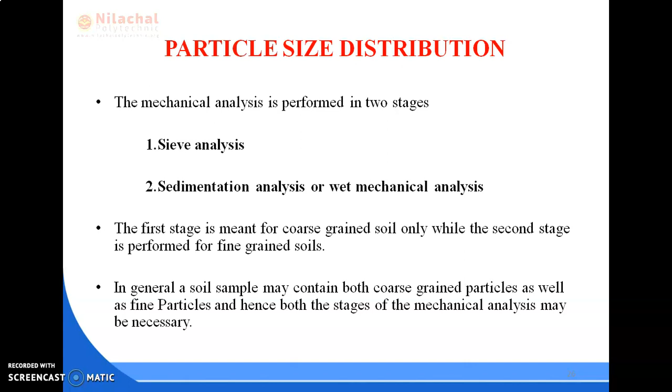So first is the sieve analysis. The complete sieve analysis is again divided into two parts: fine analysis and coarse analysis. In the Indian standard IS 460-1962, the sieves are designated by the size of the aperture in millimeters. The sieve analysis is termed for the particles having size greater than 75 micron or 0.075 mm. In that case, we prefer the sieve analysis method to segregate the different particle sizes of soil.

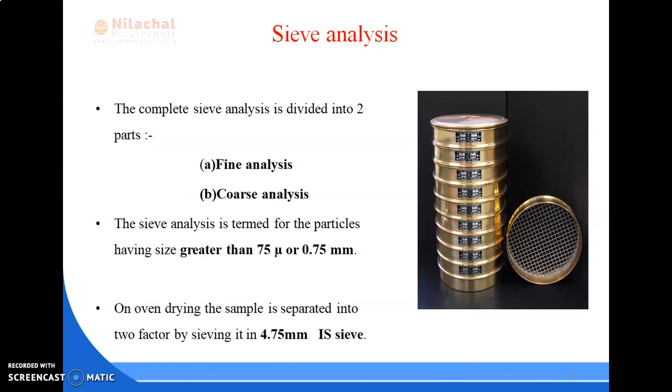On oven drying, the sample is separated into two fractions by sieving it on a 4.75 mm IS sieve. The soil portion retained on the 4.75 mm IS sieve is called the gravel fraction and is kept for coarse analysis, and the soil portion passing through the 4.75 mm IS sieve is subjected to fine analysis. Those passing through are known as fine grained soil, and those retained on the 4.75 mm IS sieve are known as coarse grained soil or gravel fraction.

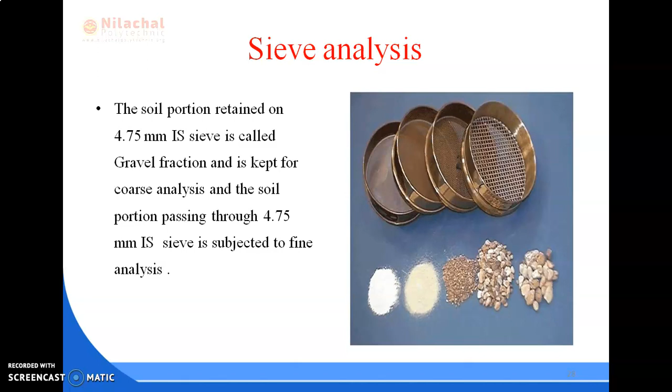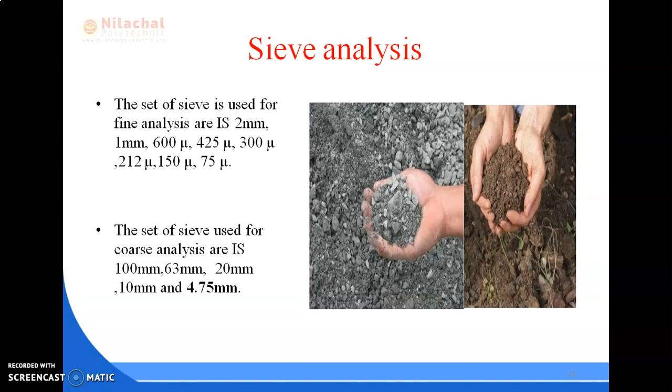Next, the set of sieves we use for the fine analysis are IS 2 mm, 1 mm, 600 micron, 425 micron, 300 micron, 212 micron, 150 micron and 75 micron, according to the Indian Standard Code. The set of sieves we use for coarse analysis are IS 100 mm, 63 mm, 20 mm, 10 mm and 4.75 mm.

Next is sedimentation analysis or wet mechanical analysis. It is conducted on the soil fraction finer than 75 micron, which is kept in suspension in a liquid, usually water. The analysis is based on Stokes' law, according to which the velocity at which grains settle out of suspension, all other factors being equal, is dependent upon the shape, weight and size of the particle.

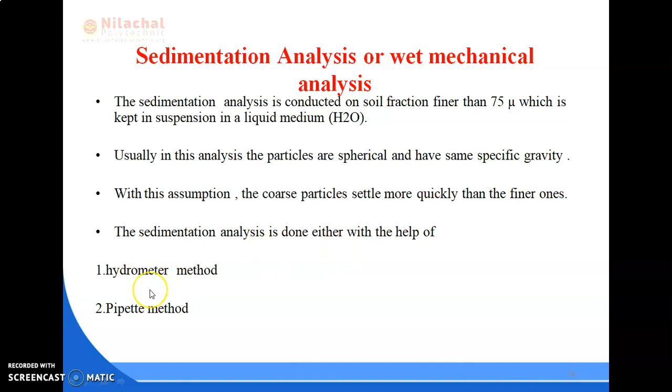However, in the usual analysis, it is assumed that the soil particles are spherical in shape and have the same specific gravity. With this assumption, the coarser particles settle more quickly than the finer ones. The sedimentation analysis is done using either the hydrometer method or the pipette method to find the particle size distribution.

In both the methods, a suitable amount of oven-dried soil sample finer than 75 micron size is mixed with a given volume V of distilled water. So in both methods, the oven-dried soil finer than 75 micron is mixed with a volume of water, and this water is distilled water.

The mixture is shaken thoroughly and the test is started by keeping the jar containing the soil water mixture vertical. At the commencement of the sedimentation test, soil particles are assumed to be uniformly distributed throughout the suspension.

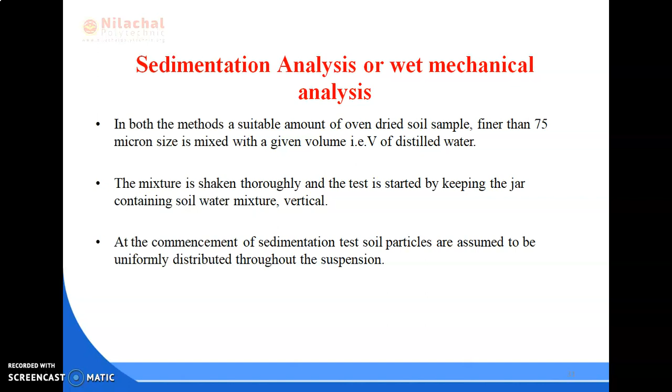For this sedimentation analysis, there are some limitations which we have to follow while conducting this procedure. The limitations are: as the specific gravity of solids for different particles is different, the use of an average value of G is a source of error. However, as the variation of the values of G is small, the error is negligible. So we have to take an average value of G.

Next, the sedimentation analysis cannot be used for particles larger than 0.2 mm, as turbulent conditions develop and Stokes law is not applicable. So we have to take care that the soil particles are not larger than 0.2 mm. Next, the sedimentation method is not applicable for particles smaller than 0.2 micron, because Brownian movement takes place and particles do not settle as per Stokes law. So if the particles are very small, like 0.2 micron, we cannot use them in this procedure.

Also, the soil particles which you take must be spherical in shape, and the particles settle independent of other particles, and the neighboring particles do not have any effect on their velocity of settlement. So we have to take care of it. The settlement of the particles is influenced by the surrounding particles as the liquid is not of infinite extent. The particles falling near the wall of the jar are also affected. So during this procedure, we have to take care of this.

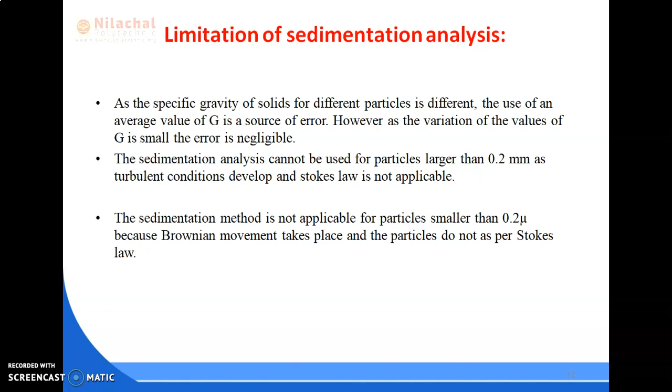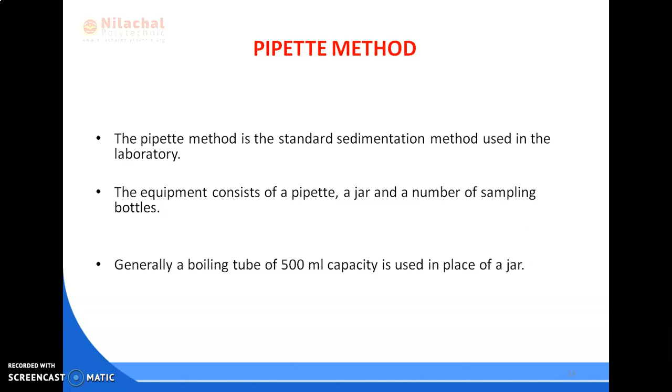So let us discuss the first method, the pipette method. The pipette method is the standard sedimentation method used in the laboratory. So it is a laboratory method. The equipment consists of a pipette, a jar, and a number of sampling bottles. Generally, a boiling tube of 500 ml capacity is used in place of a jar.

Basically, to prepare the soil suspension in the sedimentation analysis, only those particles which are finer than 75 micron size are included. Hence, the soil sample is washed through a 75 micron sieve. About 12 to 30 grams of oven dried soil sample is accurately weighed and mixed with distilled water in a dish or beaker to form a smooth thin paste, and we have to keep this paste within this pipette.

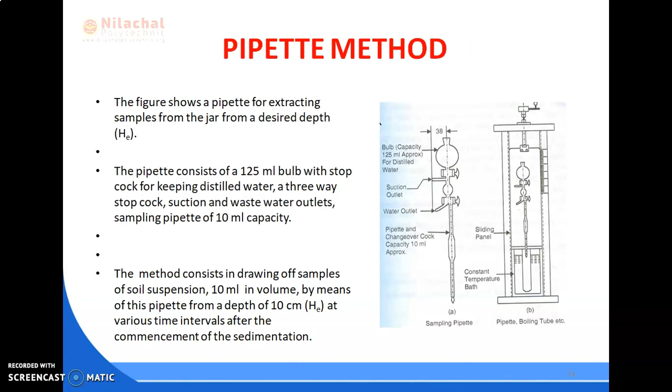In the next lecture we will discuss the next method, the hydrometer method. So thank you.